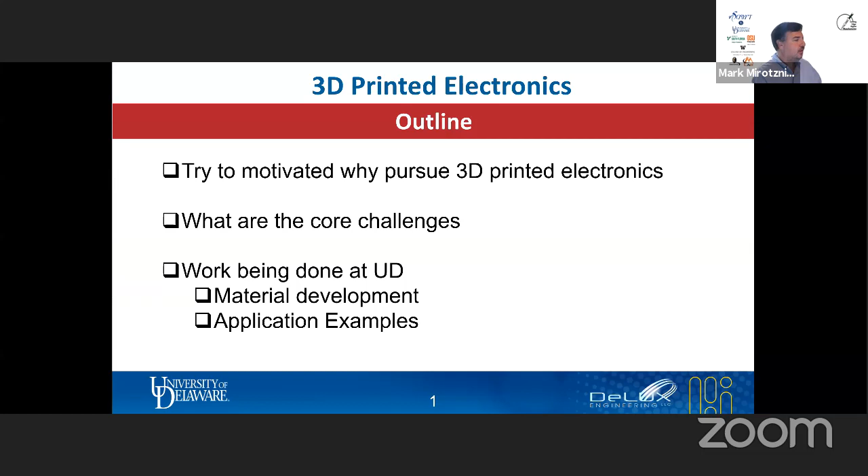So the why question I think is perfectly valid, especially when it comes to printed electronics. If there's one thing we're really good at, it's manufacturing low-cost circuit boards at extremely high volumes, and it's unlikely that additive manufacturing is going to be able to meet the volume or the cost of traditional circuit board manufacturing. But there are a number of niche areas where additive manufacturing has a large role to play. Some of the most obvious, point of need manufacturing. So here's where you need replacement parts that aren't easy to get on the space station, at forward operating bases. So it'd be great to have a printer that could actually generate new printed circuit boards whenever you needed them.

There's applications for small volume, labor intensive parts. We've done projects for companies that made really complicated antenna assemblies that took hundreds of man hours to be able to complete one, and they only made hundreds a year. You could replace some of that manufacturing with additive manufacturing and cut costs. But I'm an academic, so the reason I'm interested in this is really to build things that there's no other way to do. And there's a number of examples of those.

I stole this image on the left from Professor Rumpf, who's going to talk to you in just a minute, because he's doing truly remarkable work on 3D electronics, being able to place non-planar circuits any direction you want. We've done quite a bit of work on complex three-dimensional geometries that there's no way you could manufacture other ways. The image there shows an antenna. This is a very, very tiny high-frequency antenna, but if you dug in the inside, you'd find this has multiple conductive fins that aren't touching and have spatial resolutions of 25 to 50 microns. Very, very difficult to envision how we'd make that any other way.

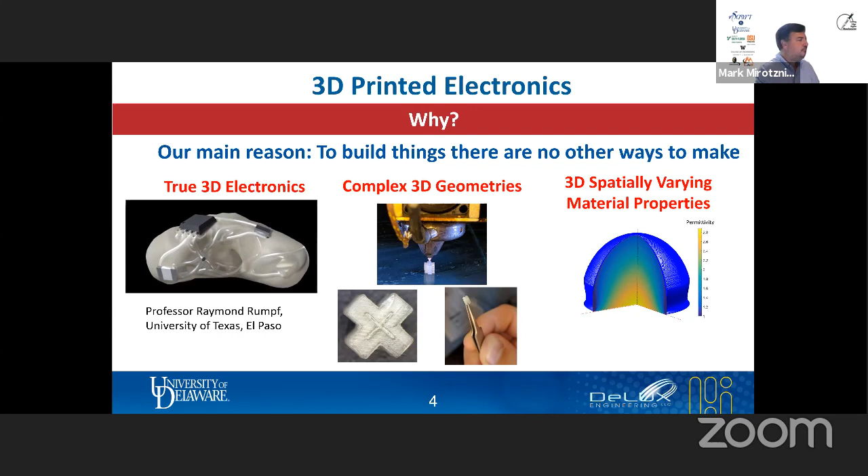Another example, and this is not an exhaustive list, but another example is the ability to make spatially graded or spatially varying material properties. So nobody's really investigated this much because there was no way to really fabricate it. But there's lots of applications where you can create interesting electronics and electromagnetic devices by being able to grade material properties in any arbitrary way. There are some challenges to get there.

Before I go into those projects, let me talk about some of the challenges that I see going forward. And there are quite a few. And I'm going to talk about 4 of them. Materials, software, monitoring and control, and new additive manufacturing or multi-material additive manufacturing systems. I think materials is probably the biggest issue we now face, especially in the kind of work I do in functional electromagnetic applications. Simply a lack of commercially available materials that I can use in those devices.

We're looking for materials that we can print that have high electrical conductivities that approach bulk metal properties. Particularly at the frequencies we're interested in, at the high frequencies, most of the inks and pastes that we purchase and can print are as small as an order of magnitude below bulk metal properties. And for many applications, that limits the frequencies that we can actually use this technology for.

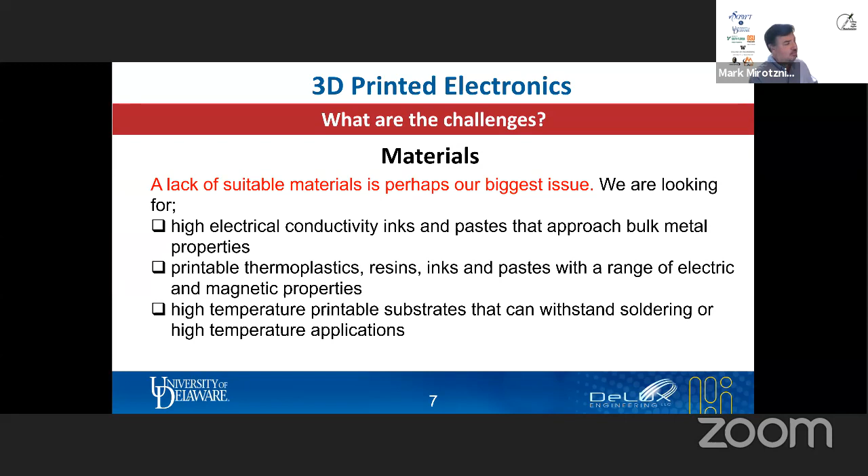We're looking for printable thermoplastics, resins, and inks with a range of electric and magnetic properties, high permittivities, low permittivities, magnetic properties. And we're even looking for a range of materials that are active materials, temperature sensing, piezoelectric or piezoresistive. And I'll talk about some of the materials that we're working on at the University of Delaware, but I think this is a huge bottleneck in the technology that we have to work on.

Another big challenge is the software, and I'm not going to talk about this too much because Professor Rumpf is really the expert on this. Developing novel software that's suited for multi-material, multi-tool additive manufacturing, that doesn't exist. Most circuit board analysis and layout programs are designed for single or multi-layer planar boards, single substrate, right? But if we're trying to make conformal or pure 3-dimensional structures, that software is inadequate.

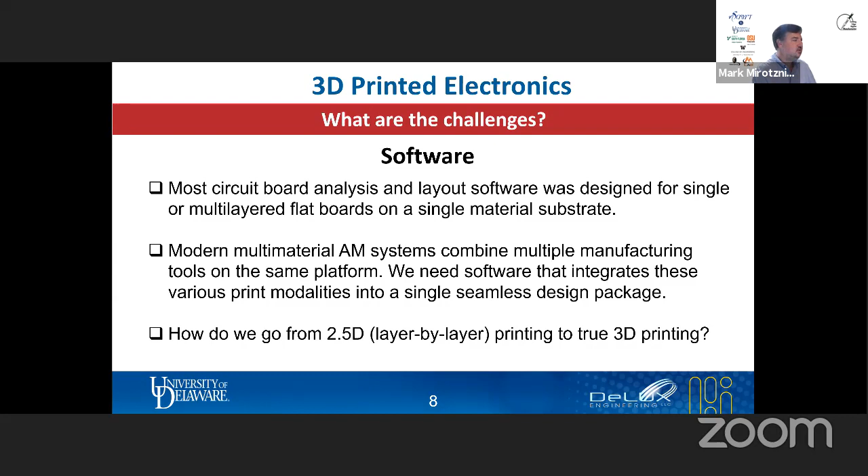Moreover, all the additive manufacturing systems that we use to build these, the multi-material, multi-tool, combine multiple manufacturing tools on the same platform. So the software has to be able to seamlessly integrate all those tools together to build the device. And the last question is, how do we go from what's currently done? We call it 3D printing, but it's really 2.5D, layer by layer, to true 3-dimensional printing. So software is a big challenge that I think Professor Rumpf has made large advances on.

There is a critical need for us to be able to do process monitoring to at least identify when a problem occurs and maybe stop the print process, but better yet, come up with control features that can identify problems and be able to rectify them during a print process. I think that's absolutely critical for us to be able to match the quality and consistency of conventional manufacturing.

I think of all the applications you're going to see me show today, and probably most of my colleagues, there's boxes of failed prints that happen before and after the one I'm going to show you. It's very difficult in these things to get consistent results when there's no process monitoring or control.

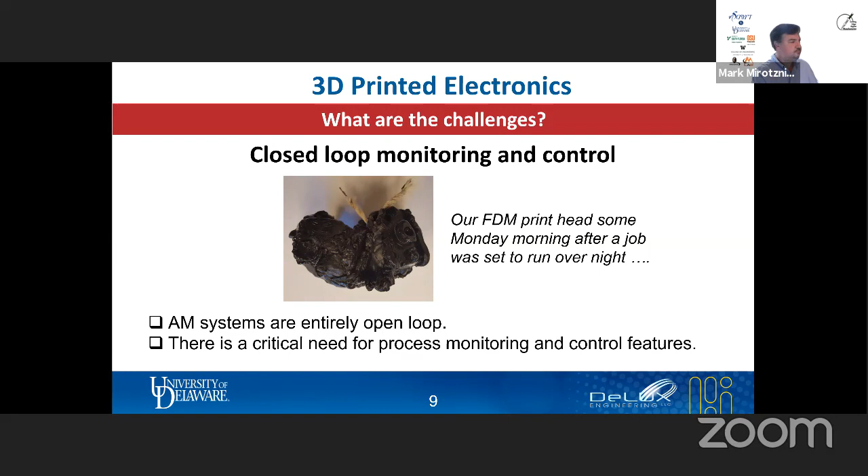The last thing I'll talk about is the systems. Most people who do electronic 3D printing actually combine a number of 3D printers together, either through manual assembly or by moving the part manually. They'll print polymers using FDM, then move it to another machine to put metal on, then pick and place or manually insert components. This results in really long fabrication times and lots of failures due to registration errors. With the spatial distances we're trying to reach, it's not practical to move the part from one machine to another. For some of the more complex 3D electronic designs we've worked on with Professor Rumpf, it's impossible to make these structures without an integrated approach.

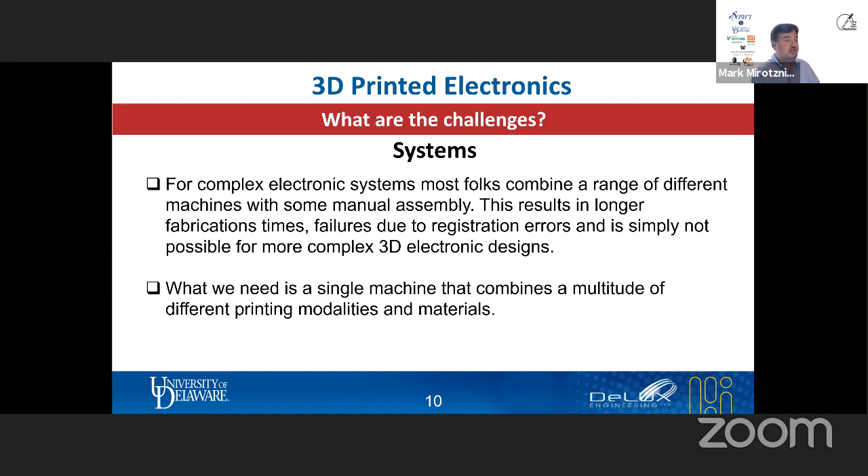So what we're really interested in at the University of Delaware is this Swiss Army knife approach to additive manufacturing — a single machine that combines a multitude of different printing modalities and materials without having to move the part.

I admit I don't work for nScrypt, but I'll put in a plug. We're big fans at the University of Delaware, mostly because they have what's closest to the Swiss Army knife approach to additive manufacturing. Their systems allow us, on a single very high resolution stage, to put a variety of printing modalities and materials together. At the university we currently have two 3D printers, the 300 and the tabletop, and we're getting our third printer towards next month, a 6-axis system I'll talk about, plus a host of gizmos we can print with — some purchased from nScrypt, some custom made and integrated into the system.

For those who've never used an nScrypt, there's a variety of things you can do with it. The smart pump technology on top can print virtually any ink or paste. We make all our custom materials across a range of viscosities, and we've printed everything from modeling clay to water out of these at very high resolution. This lets us do a lot of work in material development of new materials and print those as custom inks and pastes. It also has a very nice FDM printer for thermoplastics and pick and place of electronic devices.

We have a micro mill, which is really useful for RF devices because many surfaces are too rough after we FDM print them at high frequency. So we go over those surfaces with the micro mill and smooth them down to a couple of microns, which makes a huge difference.

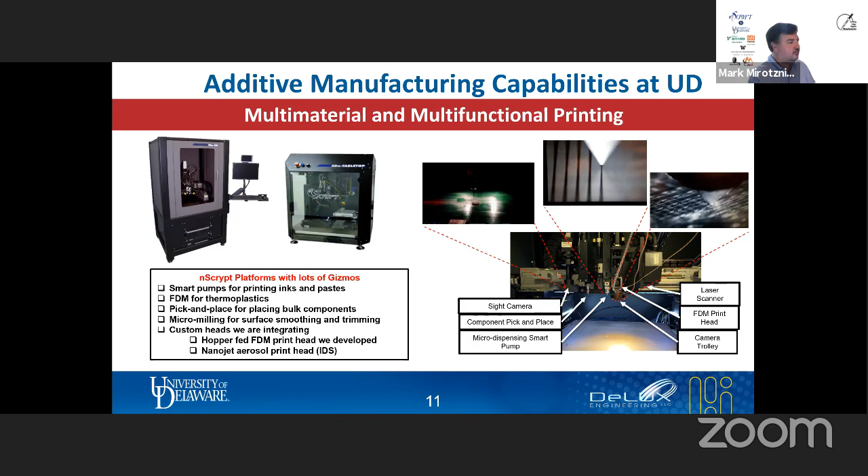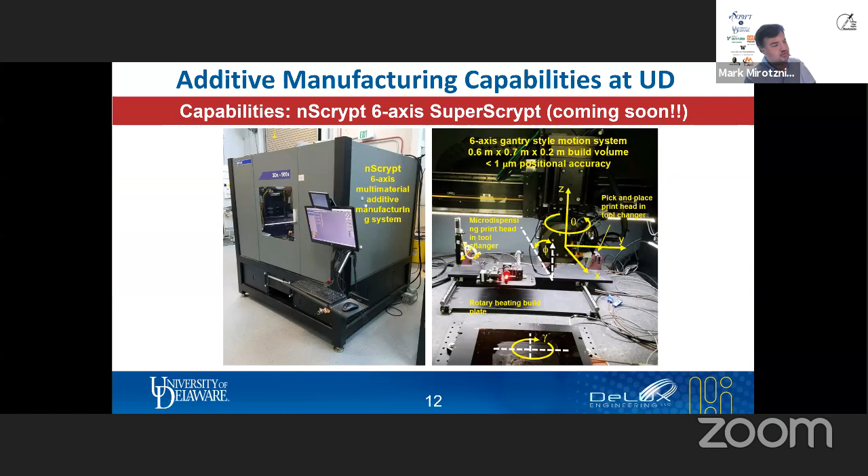So this is a range of gizmos we're able to use. This next one is coming — what we're really excited about, to get away from XYZ printing and go to true three-dimensional printing. This nScrypt is coming next month, and we'll be able to do true 3D printing through a 6-axis system: pitch, yaw, rotate part, XYZ, all the same gizmos through a tool changer. We're super excited about exploring that.

A little bit about the laboratory I have at the University of Delaware. We have a brand new 4,500 square foot lab dedicated to research and applications of functional additive manufacturing. This is where we house all the nScrypts, all our material development, and a variety of other printers. I talked a little about materials being the bottleneck — I'm not a material scientist, and I kind of got pulled into that kicking and screaming a little bit, but it's absolutely essential to do the kind of things I want to do.

And so we do quite a bit of functional material development at the University of Delaware. We have our own custom made polymer filaments for FDM. In this case, these are filaments that we put additives in to change their electromagnetic properties. So we can make high dielectric constant, low dielectric constant, magnetic, temperature sensing materials. We've made a range of polymer filaments that we can spool and print using FDM.

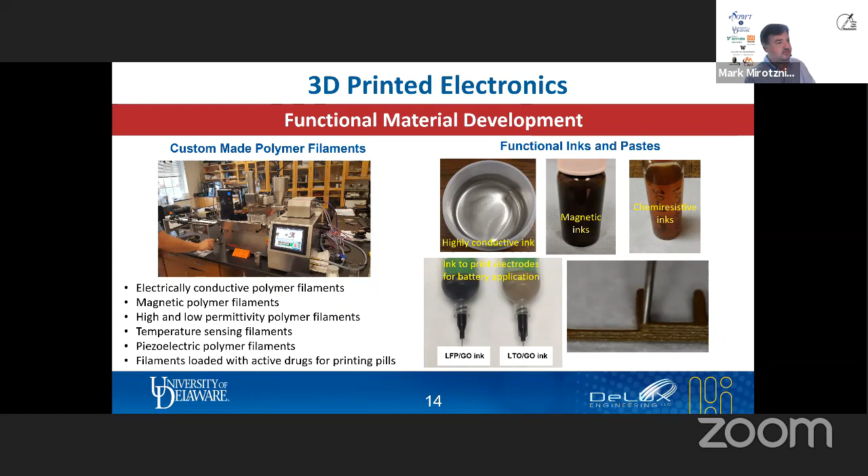We also make a lot of functional inks and pastes that we can print with the smart pump technology. We've made our own highly conductive inks, magnetic inks. We have a chemiresistive ink that we use for chemical sensing, and we're starting to print batteries.

So I'm going to jump into some of the application areas that we've worked on to give you a sense of where we think the state of the art is. The bread and butter for most of the work that I do is really high frequency RF applications, and we've made RF devices that have worked all the way from DC to 110 gigahertz.

Here's some examples. The one on the left is an RF printed assembly. This was a military project to see if you could 3D print the front end of a Ku band communication or radar system. Everything you see there was either printed or pick and place, with the exception of the connectors, which were put on at the end. Everything else was printed or pick and place, and it functioned.

The goal of this project down the road is to make this entirely conformal, so we'd have an RF front end that we could fit into a cone shape or a spherical shape.

And Mark, you got about 2.5 minutes left. Okay, then I'll go fast.

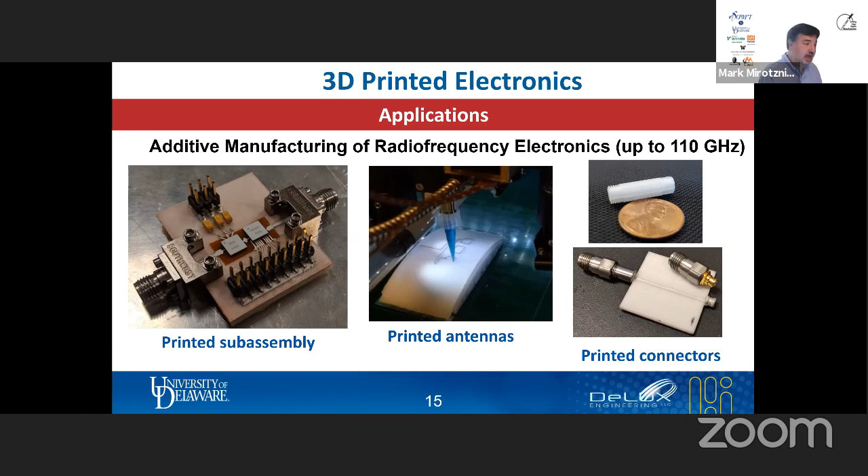So then we've done a lot of printed antenna stuff and connector work. Here shows an example putting it all together. This is an antenna. I don't think there's any way to make this without additive manufacturing. It's a dual band, dual polarization antenna, has 2 different permittivities and all printed connectors. These are SMA connectors that are threaded that we print on the structure.

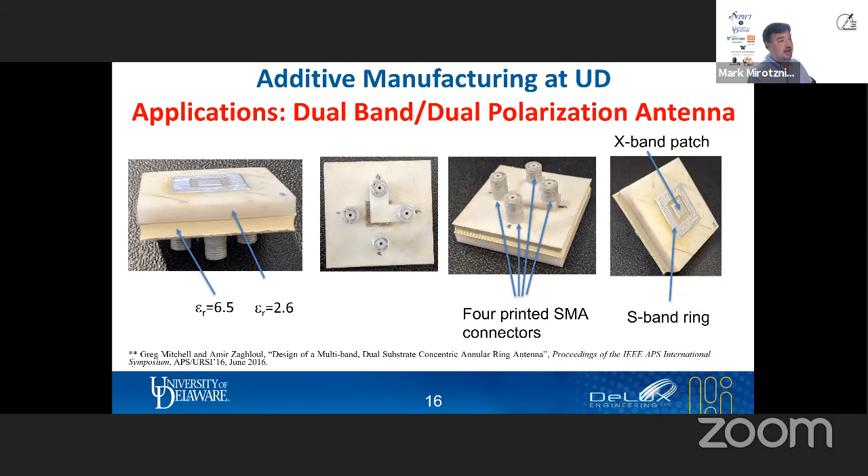The connectors are by far the least sexy, but the most useful part of the device, and the point of large failures. This shows us printing a chemical sensor.

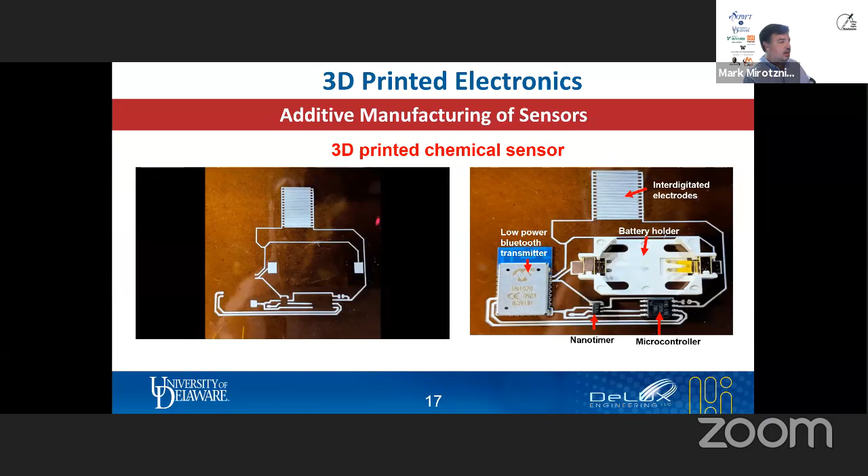So this was used to try to, on a flexible substrate, show the nScrypt being able to print all of the electrodes. We had a chemiresistive ink that we put on there, and we could pick and place all of the electronic gadgets. At the end, all we did is put a battery on there and it worked.

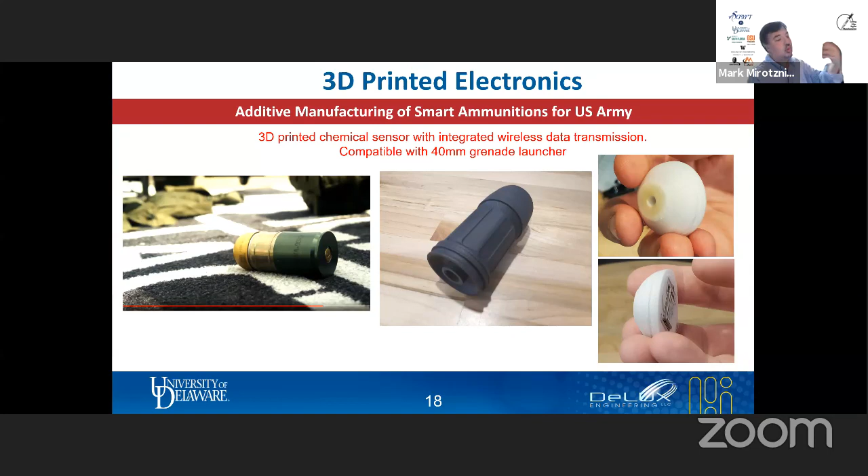We've integrated that chemical sensor actually for an Army project into the shape of a 40mm grenade ammunition. The idea here is we have a chemical sensor in this form factor that soldiers can carry with them. They already carry these 40mm grenades. Instead of taking the normal grenade, they would take the chemical sensor, launch it into an area they're interested in. It will wirelessly transmit chemical data back.

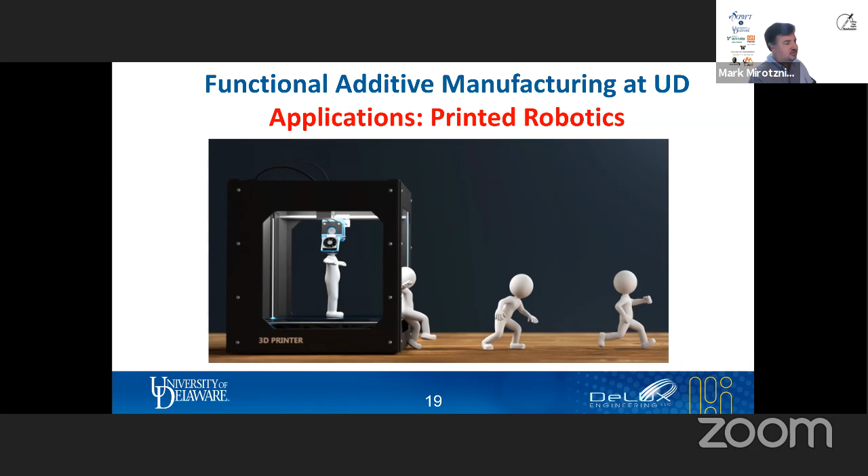This is the last one, I'll stop at this. So the last project, kind of a fun one, is printed robotics. The idea is, can we print a fully functional robotic system that when it walks out of the printer, pushes the button and prints the next robot? We're not quite there, but this shows the progress we've made over the last year.

So the idea is everything is going to be printed or pick and place. We're not quite there yet. It'll be removed automatically from the build plate, can move off the build plate, survive a fall, and then you can make the next one.

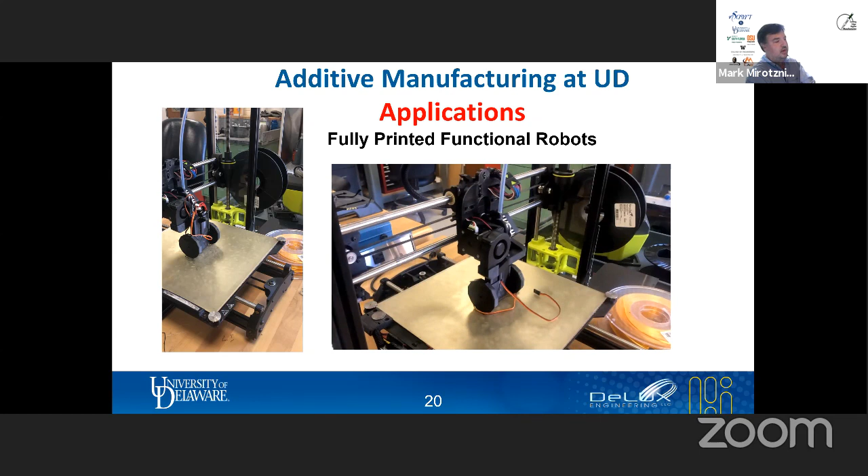So this is a fun project we're working on with Tardec on seeing whether we can do this. This shows it being snapped off the build plate.

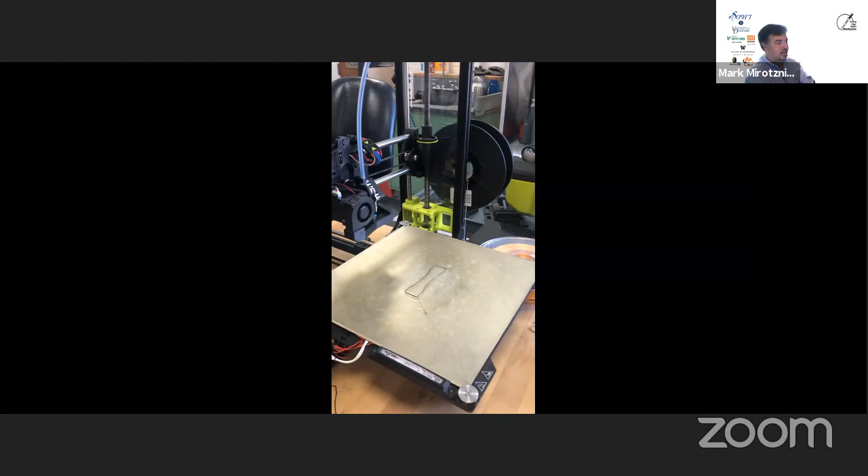And I'll end when you can see it falling off the table. So it had to survive a fall off the table onto hard ground, and pretty soon you'll see it scatter on the ground there. There it goes. So that's about the closest we got to an automated 3D printed robot.

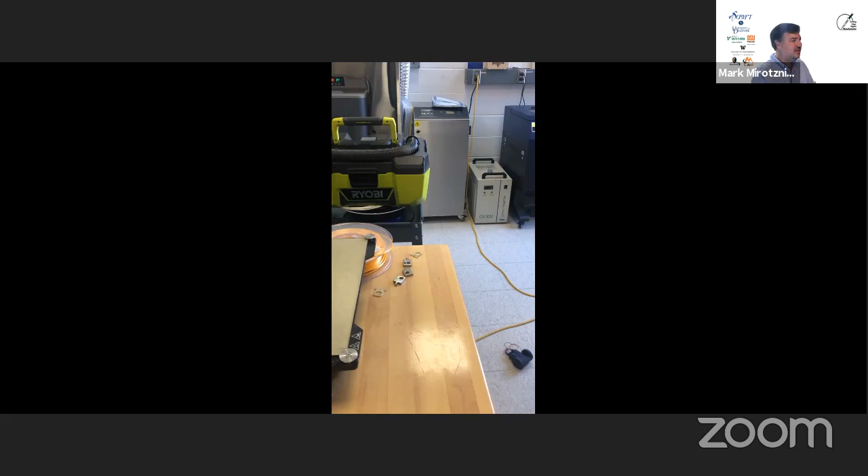Hopefully if we do this next year, I can show you advances on this. So I'm gonna stop there. We've done work on printed ceramics, high temperature applications, so if anybody has any interest there. And we've done a lot of work on passive beam forming lenses for antenna work. So I think I will end there, and I'll take questions at the end.

Thanks a lot, Mark. I appreciate it. Jing?

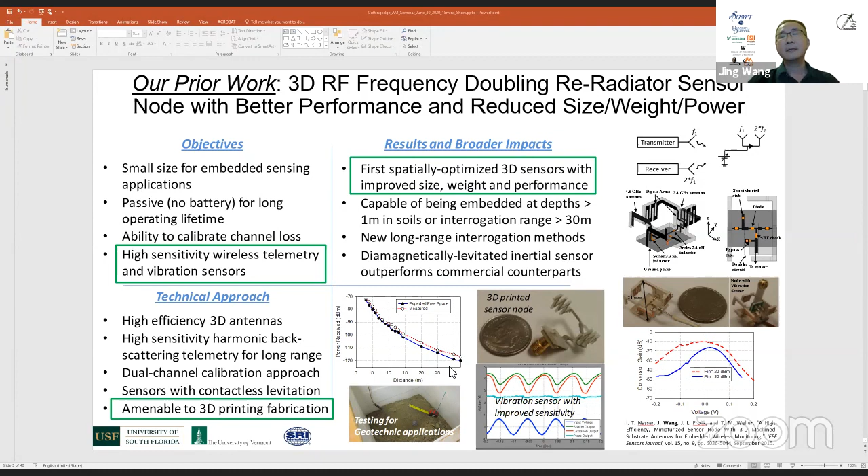In order to do additive manufacturing, we chose to work with the technology offered by nScrypt, which combines laser machining with additive machining in a single platform without moving the part off the printer bed. We started by printing multiple layers of alternating materials, printed substrate material and printed conductive material, in a way very similar to how traditional multi-layer printed circuit boards are constructed.

We did this by adding features such as electronics, either manually embedded or pick-and-place embedded, into other important RF components, such as the feeding network for antennas, the antennas themselves, and some combiner, splitter, and filter functions for power.

With added laser machining, we were able to achieve feature sizes down to about 3 to 5 microns, as detailed in a later part of the discussion. We also played with the wavelengths of the laser to enable the feature size to be in a certain range. As you can see in this picture, using the laser you can cure the ink at particular locations, which also helps reduce the losses of the conductive ink.

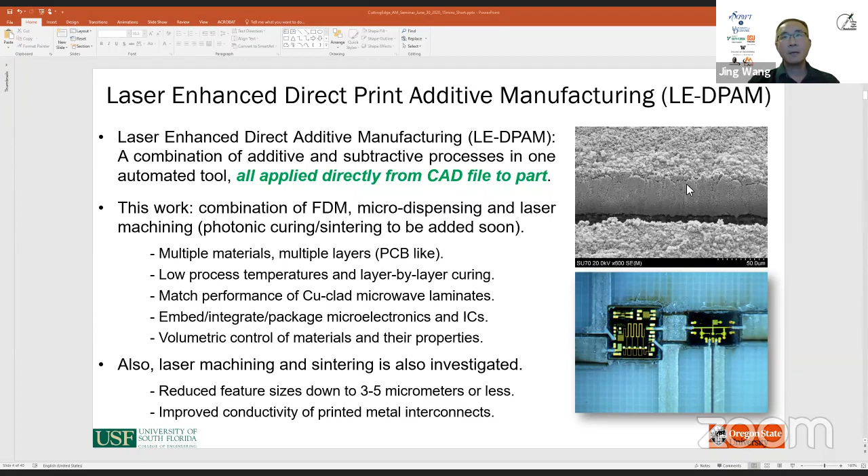So carrying on the previous work, we try to simplify the layer structure, fully modifying the layer material properties, such as making some of the layers with low infill ratio, targeting better radiation performance, particularly wider bandwidth, better front-to-back ratio by inserting a cavity on the back of a patch antenna and feeding the patch antenna using aperture.

And also one of the key elements we already have in the previous example, in this case, we try to introduce a conformal low form factor, hopefully totally flat insertion of microelectronics. At this stage, we're still dealing with packaged electronics, such as phase shifters, switches, and other electronics, all combined into a multi-layer print. The previous example has 7 conductive layers, 7 substrate layers. Most of these prints have fewer layers to further simplify the print, improving the yield and also reducing the time.

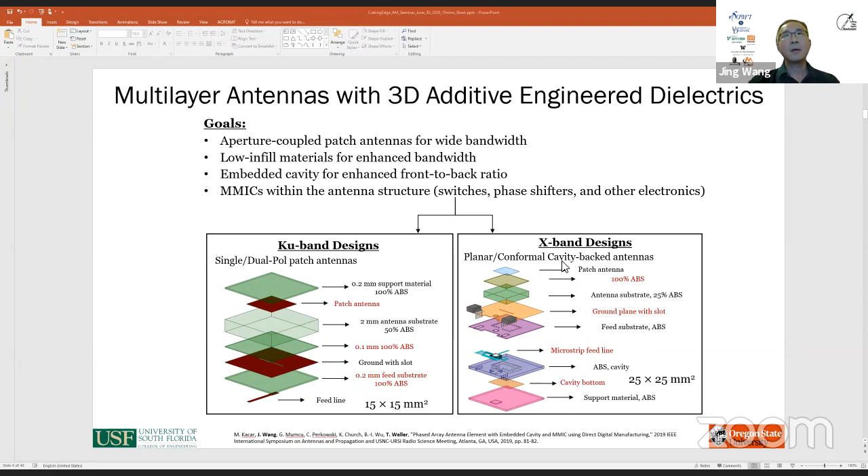So the next page is an example of this print. So we designed such an X-band phased array, and this phased array shows 4 conductive layers and 5 substrate layers. Most importantly, in order to improve the antenna radiation pattern, we introduced 50% infill ratio, reduced dielectric on the back of the patch antenna. And also we inserted this cavity to modify the front-to-back radiation pattern.

And we directly inserted the phase shifter chip in a QFN package, while directly printing on top, making the cavity, using isolated via hole pillars. By implementing all these measures, we achieve a fully printed phase shifter package.

And we are able to engineer the back lobe, as I will show you in the next page, and the front-to-back ratio. And we're able to tolerate different types of antenna design and feeding network. In this case, we're using aperture to feed it, but we could also change it to other configurations as well. So there's 4 layers of printed ink and 5 layers of ABS substrate in this multi-layer print.

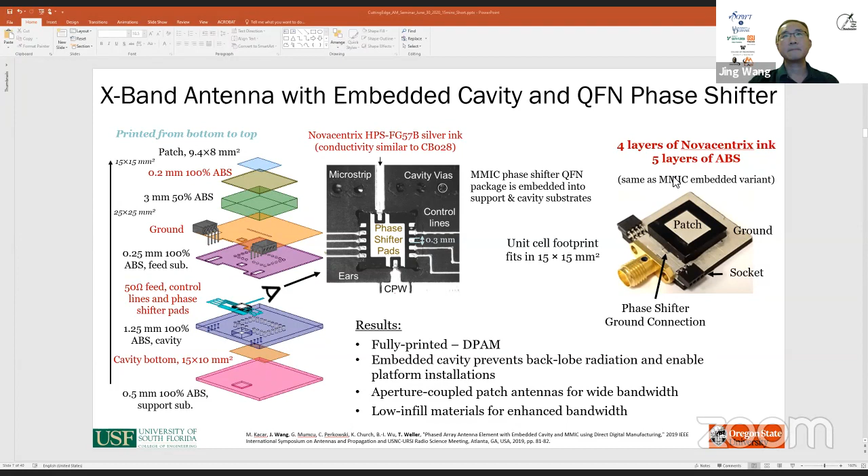So here shows the electronic measured performance of such a phased array. As listed here to the left, this phased array shows about 24% of bandwidth. As you can see, all the bits show a good reflection coefficient between 9 and 11 gigahertz, which is the operational band of such a device.

And we achieve a radiation gain. The peak gain is 7.2 dBi, with 6 dBi of gain between 9 and 11 gigahertz. And this device shows radiation efficiency of 80%, while including all the transition features we incorporated into the print, and showing a front-to-back ratio better than 20 dB.

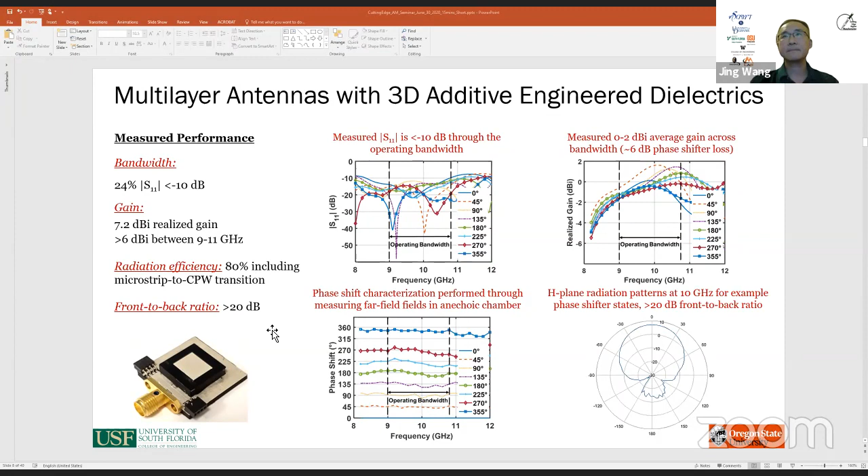Most interesting is this plot, which shows the different bits of the phase shifter. As you can see, they're more or less flat across the operational band. So since I'm not showing this in slide show mode, this movie will not play.

This would be a movie showing how we print the cavity on the top to hermetically seal the already packaged IC underneath. After sealing the IC, we also tested this package as a hermetic protection. Besides the electronic feeding on the side for DC and RF signal, this package we directly printed on top also serves as a hermetic protection against the environment.

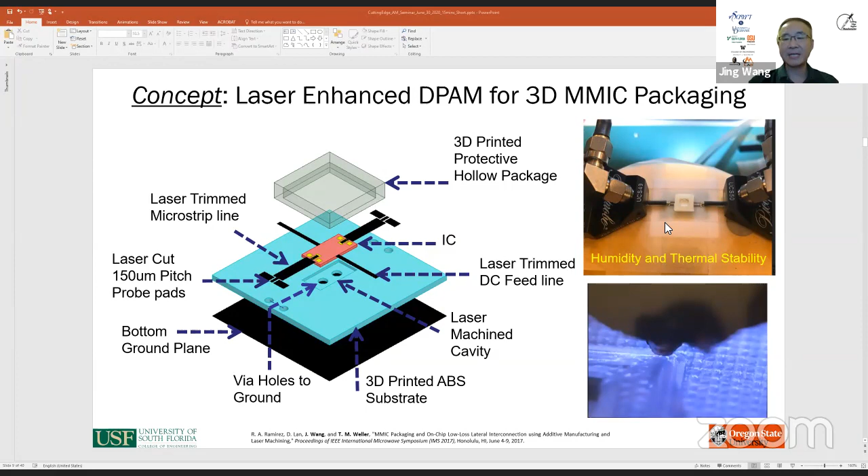So this briefly shows all the layers. One of the most important features was to use laser machining to make a cavity. So when we pick and place or manually insert the IC die, which is about 50 to 100 micron in thickness, the IC can snap and sit in the precise position and flat on the surface, in contact with a via hole or ground contact on the back.

On the front side, instead of using wire bonds, of course, we directly printed the interconnect to all the probe pads, which are in the 50 to 80 micron size range. In order to make a transition between a CPW probe feature into the microstrip, we're using laser machining to enable that, which allowed features down to, back then, 10 microns at a longer wavelength.

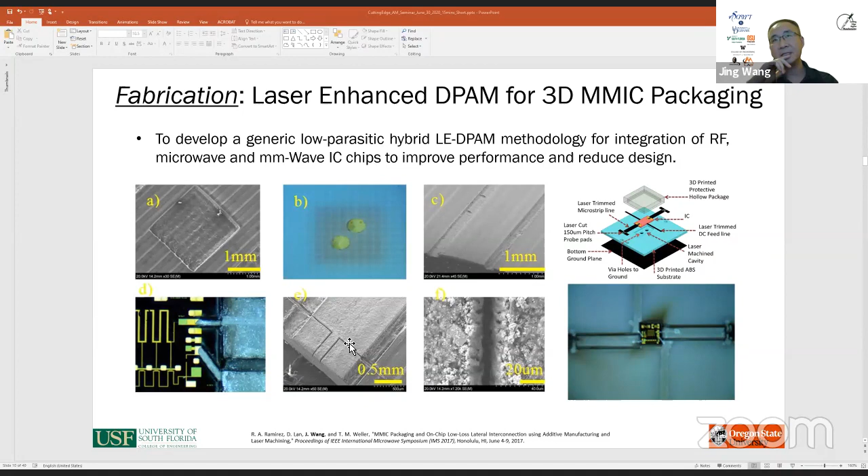Let's switch one more page. There's always a delay for switching page. Anyway, I keep on jumping that page.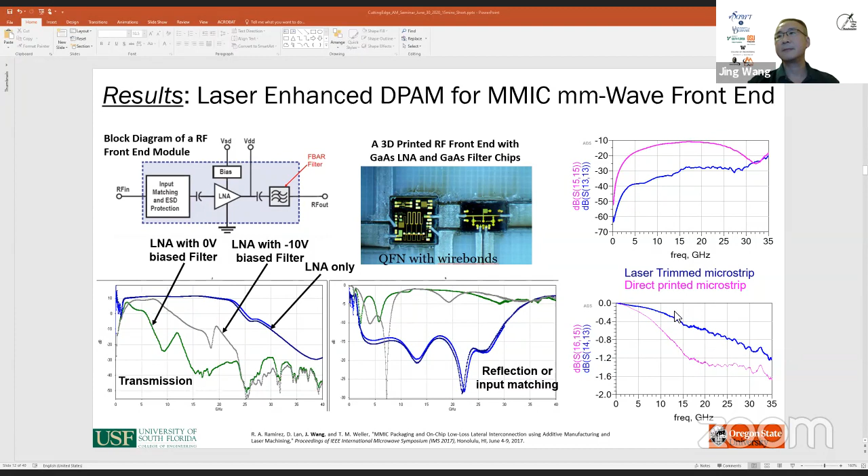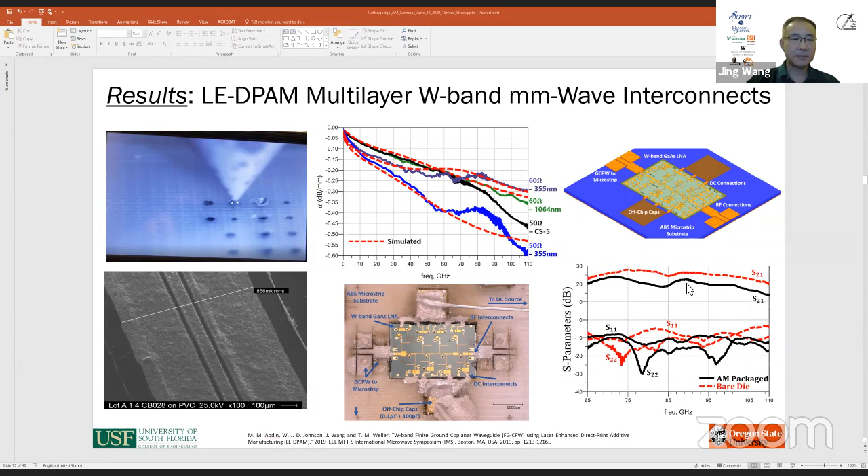Dr. Wang, you have about 2 minutes. Okay, so let me move to the next page.

So the next topic, another important topic I can hopefully quickly cover in the 2 minutes time frame, is moving towards dielectric. This is driven by the fact that most of the conductor losses are still very high when you talk about 50 or 100 gigahertz and above, but as you go into higher frequency, the wavelengths also shrink due to the use of sometimes high dielectric constant material. And there's the ability to print those as if they're optical fiber. You can incorporate features like total internal reflection using those fiber-like dielectric waveguides as interconnects between chips, sometimes between integrated circuits and modules.

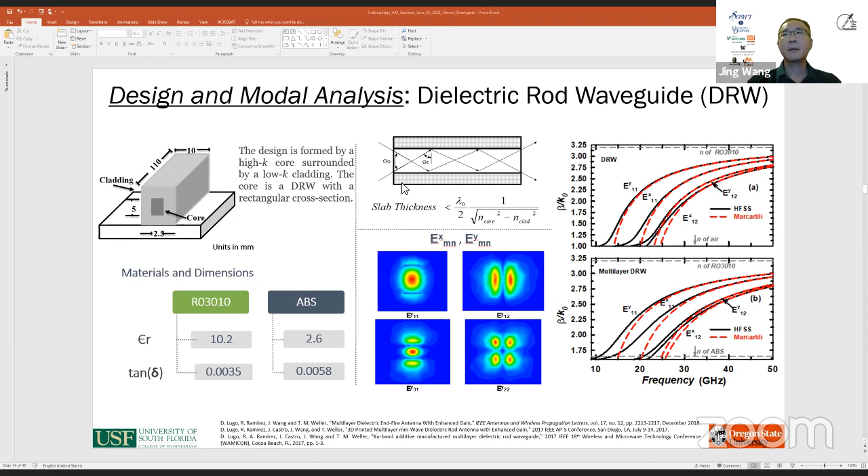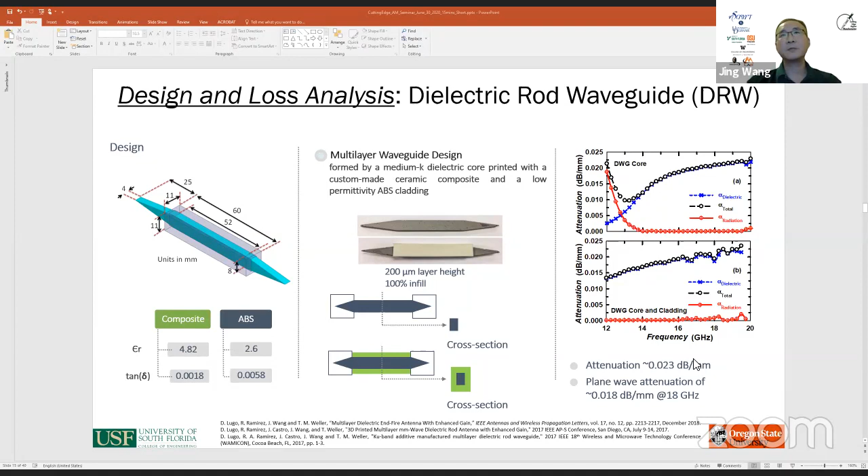So as a result of that, we also further investigated such a feature with and without a so-called cladding material to further increase the bandwidth, while also reducing the coupling to adjacent features, allowing the structure to bend. One more slide I will show is for such a device with and without cladding layer, which is a low-K dielectric enclosure.

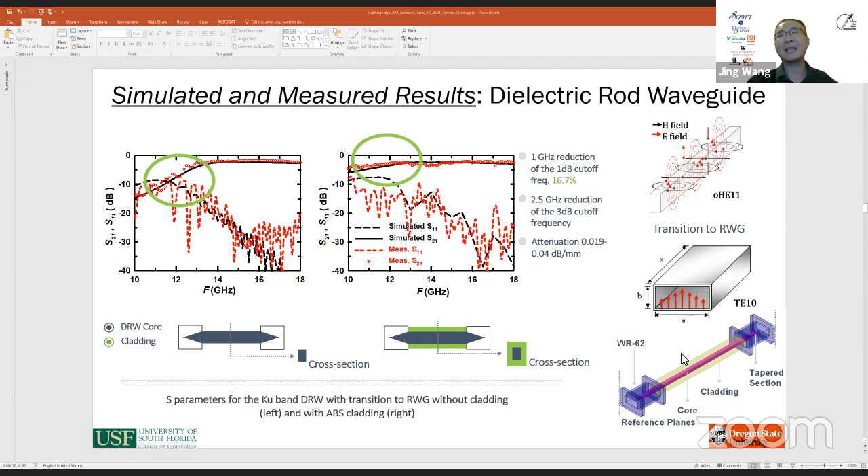If I can switch slides.

The next topic we'll talk about a little bit is how to use the planar feeding network to feed such a device, which we started to research in recent days.

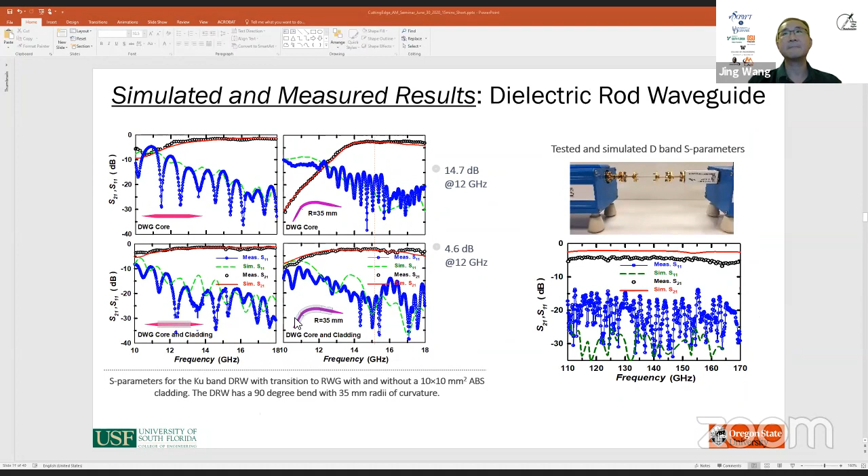Somehow switching the page is slow. If I can go back one more page. Yeah, Dr. Wang, unfortunately, I'm going to have to ask you to finish up pretty soon. Okay, let me just go to the final slides.

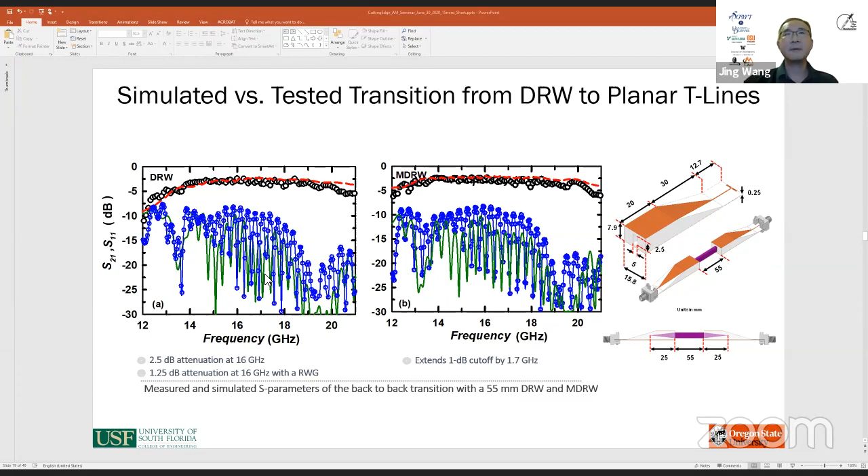With that, I will just quickly say our research focuses on a combination of different integration of electronics, but also introducing spatially engineered 3D printed dielectrics to allow you to make unique radiation devices such as antennas. In order to do so, we also develop all the material in-house. With that, I will just conclude.

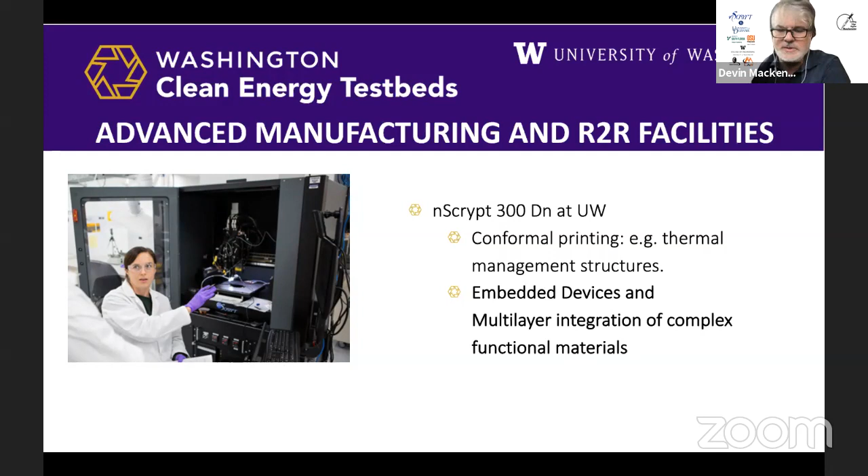And so I'm going to talk on 2 areas, one in batteries, and then I'll talk about some wellness sensing, special medical sensing devices where we need that really special materials capability, and how do we hetero-integrate materials in a single manufacturing process.

So batteries: everyone needs batteries, whether we're trying to make Teslas, SpaceX satellites, Bluetooth headsets or IoT devices. Batteries are a ubiquitous need. At the small end of that, thinking about IoT, smart labels, wireless, medical and pharmaceutical related devices, the batteries need to be extremely thin, and have other important characteristics. They have to have very low environmental impact.

As we start seeing smart packaging, say cold chain labels, electronic labels on your package of meat from the grocery store or your pharmaceutical delivered via internet, you want to know that those foodstuffs or those drugs have been kept at the correct temperatures, or are actually what they say they are, brand protection. We're embedding electronics into those.

We want those electronics to be inconspicuous, embeddable, and the competition in that space is essentially the printed barcode, which is incredibly inexpensive and very conformal, easy to use, but of course passive. We want to add active functionality to that, but we need to do it in a way that's very low environmental impact in terms of materials, because many of these devices will end up in a landfill. So lithium is out. Of course, lithium for transportation is also an issue, because lithium content in a transportation package can deem that to be a hazardous material shipment, which is also a big problem.

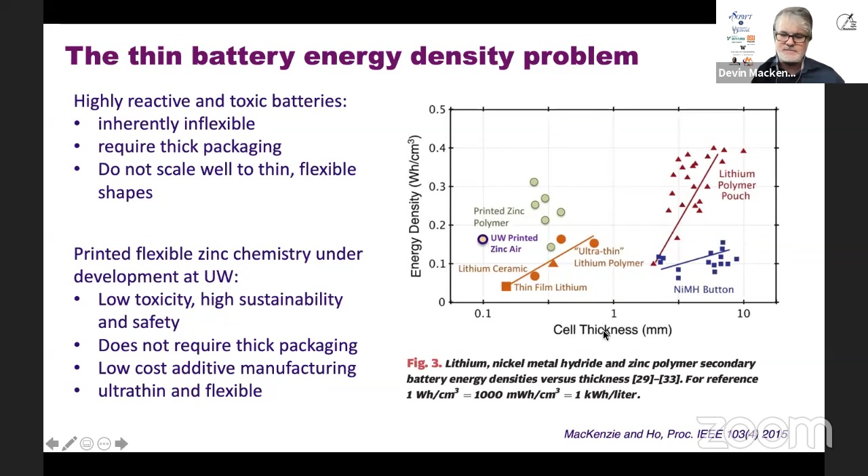So we've developed a material set. Getting a little bit slow advance here.

We developed a material set to realize a fully printed, additively manufactured metal air battery system, where we use 3D printing in planar structures to integrate complex materials, where we want to monolithically integrate a battery. We can't use a separator and packaging assembly cell like a lithium pouch cell that's held together by atmospheric pressure. We need to make a monolithically integrated battery where each layer is in electrochemical or electrical contact with the other layer inherently, and requires no further assembly.

So we develop custom conductive inks, of course, to conduct electricity, but also anode inks, in this case zinc metal inks with conductive additives, to provide our zinc ions for our zinc batteries. We need to develop electrolytes, and this is probably the trickiest part. We develop polymer, ionic liquid, deep eutectic solvent-based electrolytes that print as liquids but then hold a solid shape so that we can print on top of them, which is fundamental.

Not only do they need to hold their shape to print on top of them, but they also need to hold their shape in the final application. There's no other separator here. There's no mechanical structure that can keep the anode and cathode from shorting into each other, except for this electrolyte. So it has to be a semi-solid electrolyte. So we develop these materials that can be printed and then formed into semi-solid or solid flexible materials.

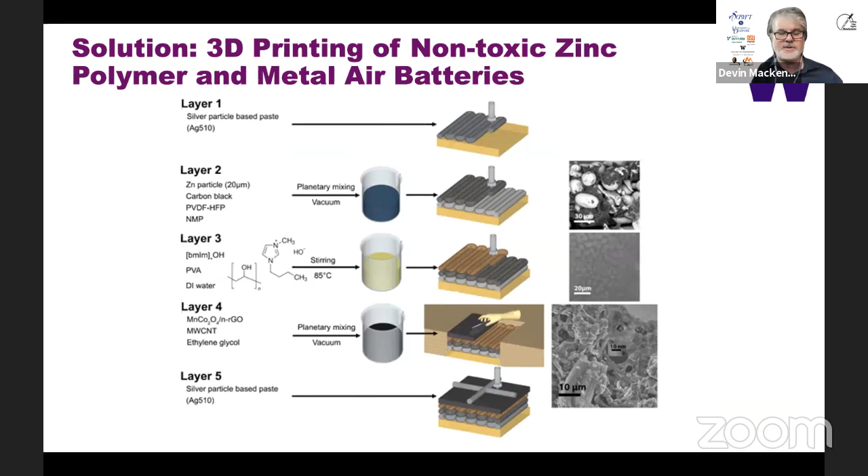And then on top of that, we'll, for example, inkjet print a grid-like current collector to collect the large currents and pull them out of the battery. This is an example of a cross section. As far as we know, this is the thinnest printed or flexible battery of its kind in the world. We see a structure of an anode, a solid printed electrolyte, and this hierarchical catalyst.

And we demonstrated that by developing those materials, really optimizing the electrochemical performance but also the electrical performance, to get to high rate pulsing, something notoriously difficult for metal air batteries.

You use metal air batteries in hearing aids. You stuff it in your ear, it's warm and moist, works great. But those are actually very low current batteries, maybe 1 over 50 to 1 over 10 C batteries, in the sense that they dissipate their capacity over 20 to 50 hours. That's a very low rate. They're typically very hard to get to pulse. If we want to use those for wireless sensors, for really almost any ultra low power electronics now, where they're primarily in a sleep state and then woken and activated to send or receive a wireless packet,

they need instantaneously very high current. For this size of battery, anything from a few milliamps for very low power BTLE up to 100 milliamp pulses for something like LoRa long distance wireless signal. Because of this very thin integrated structure, we've been able to demonstrate multi-milliamp, maybe 5 milliamps per square centimeter or more, pulsing out of a 100 micron total thickness battery. That's everything, substrate to top of the battery, 100 microns in total.

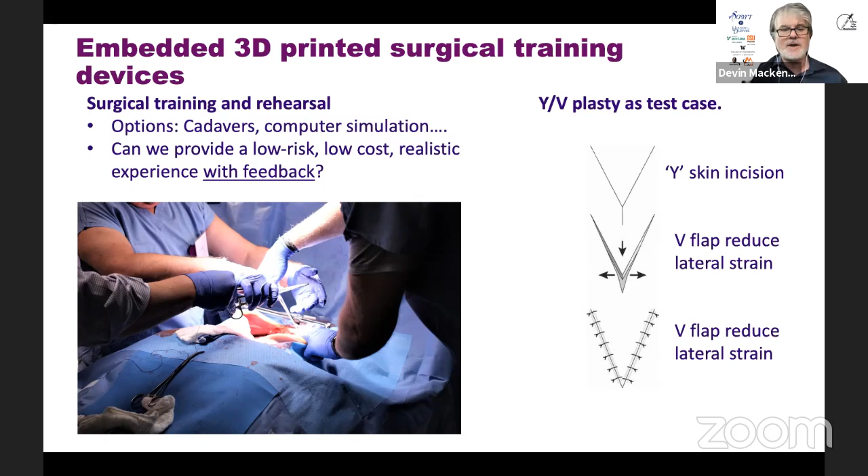So working with the CREST lab at the University of Washington Medical School, we developed stretchable electronics for medical simulation that provide feedback. An example operation is a Y-V plasty, where a part of your skin is pulled down, restitched and stretched, getting stretched a couple hundred percent during the procedure. We want to know if students or doctors practicing a complex operation are doing it properly, stretching enough or too much. We want to sensorize this device.

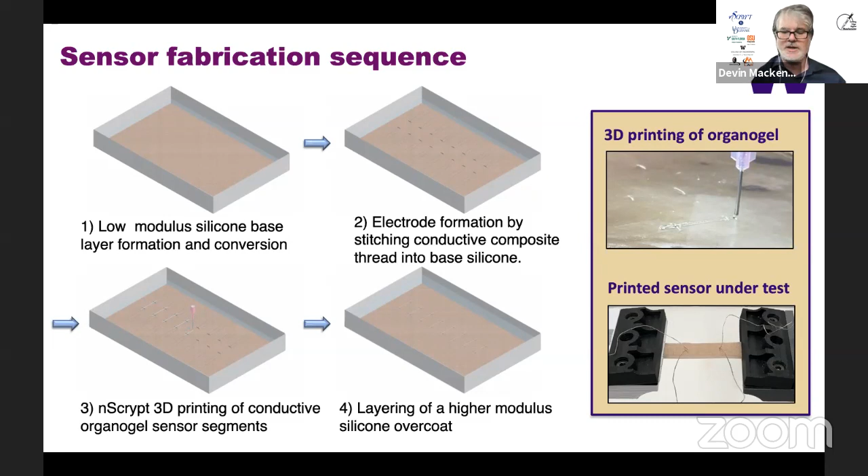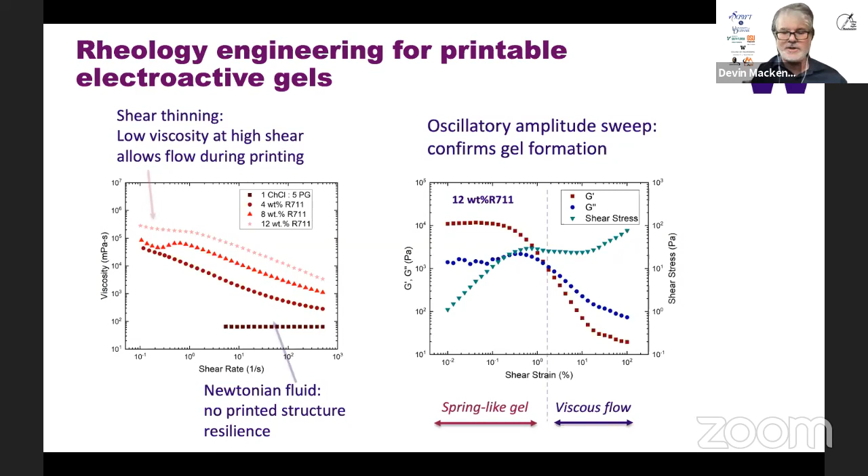So we developed a 3D printed structure involving different silicones to simulate skin, but most importantly we developed a 3D printed organogel, which is the actual meat of the sensor that allows flexible sensing. We had to custom engineer that material to get special flow properties, so it flows while printing but is solid as it sits, so the feature doesn't slump, but also so we can print other materials on top of it to simulate additional skin layers without losing its physical shape. We do a lot of rheology engineering on those inks, in addition to the electrochemical properties, to produce gel-like and viscous flow regimes in a printable sensor material.

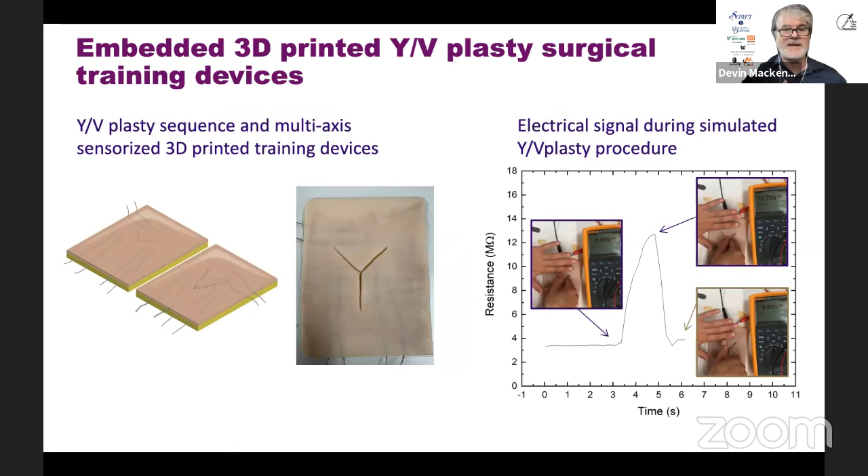Here's an example of a fully integrated 3D printed sensor, where on the right you can see the electrical response as we stretch these different skin flaps during the stitching operation. We get direct feedback, something mechanically similar to human tissue, but that gives us sensorized feedback for training and practice.

We've shown this sensor to be quite reproducible over many thousand strain cycles, using these rheologically engineered, 3D printed organogels from our nScrypt system, with very close tracking between input signal and sensing signal, and very high reproducibility.

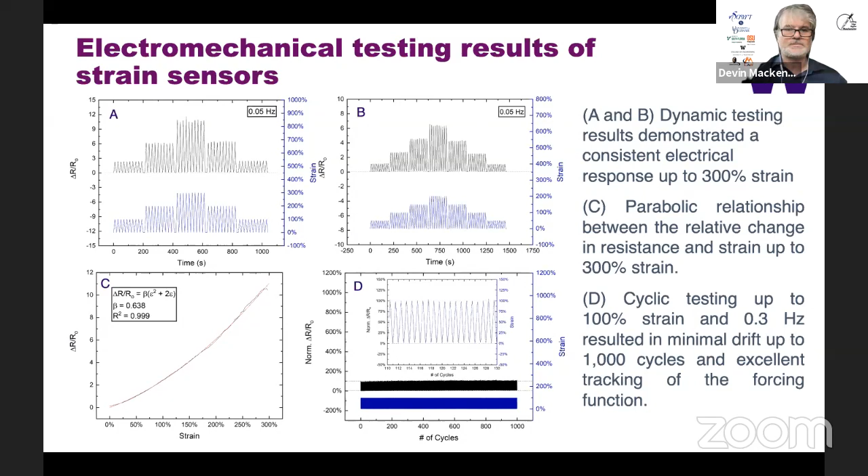I'd like to close by saying this fits into a larger part of our lab, which is an open access industrial laboratory. We provide access to the nScrypt tools along with all other print tools, characterization tools, and professional staff for people to do research across scales, from prototyping and small scale manufacturing all the way through to very large scale solar manufacturing and even grid integration studies. So with that, I'll wrap up.

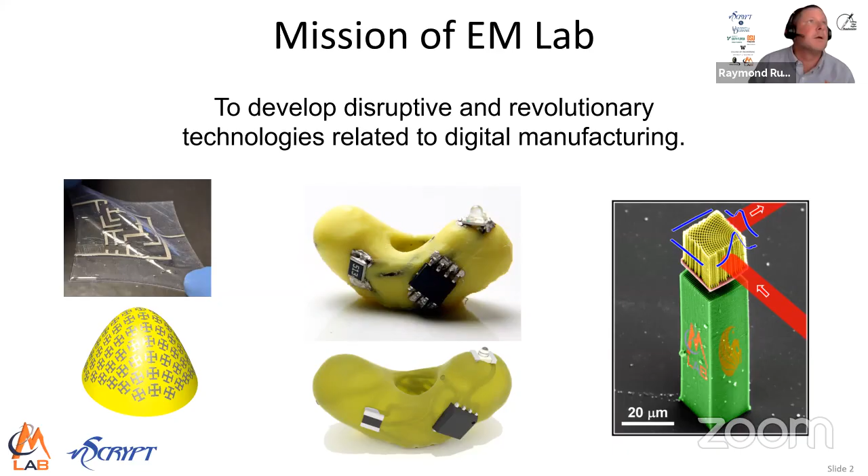So I think a great topic to talk through is our work in 3D volumetric circuits, and this is really what drove a lot of our innovations here. If we think of circuits, we think of roads on a map.

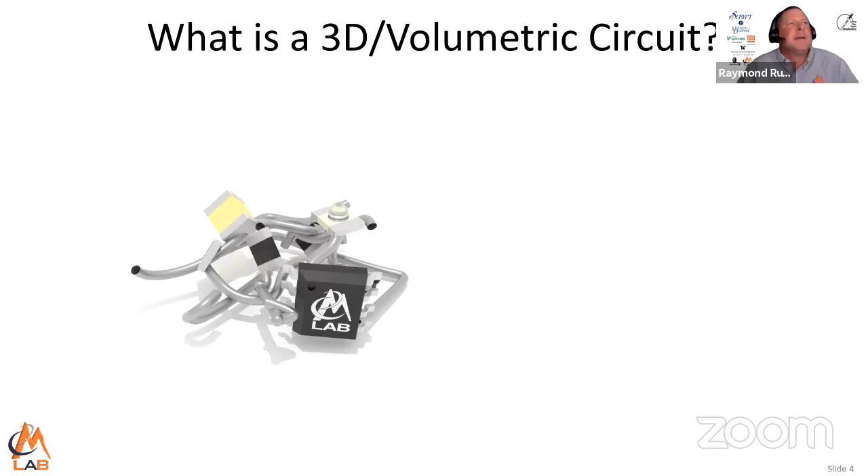And if we pop open our computers and we look at the circuit boards, everything is quite flat. So we have in mind doing something that's much more 3-dimensional, where the components can be placed at any position X, Y, Z, can be oriented at any angle theta and phi, and the interconnects can follow these smooth sort of splines throughout 3 dimensions.

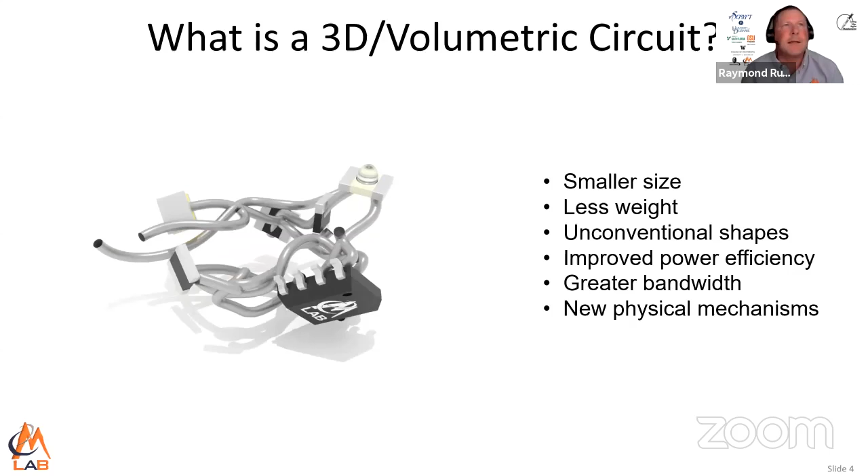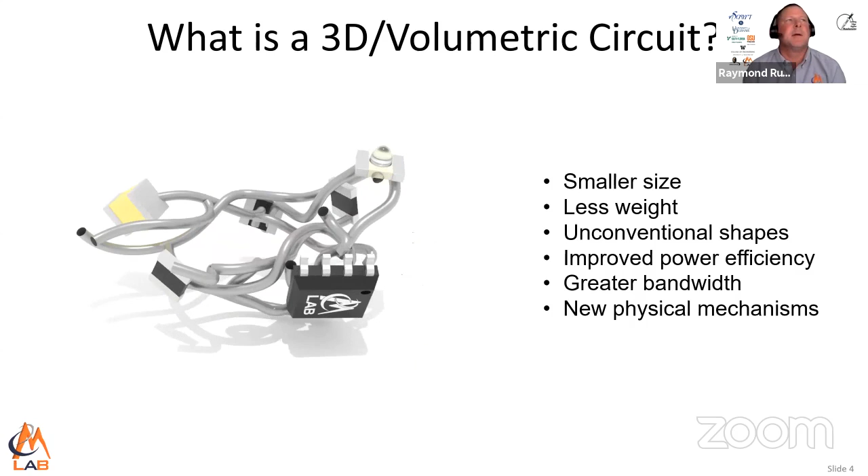And if that could be done, that would allow a much more intelligent placement of the components, which would minimize your size, would minimize your weight. It would reduce the lengths of the transmission lines, which then improves power efficiency, increases bandwidth. If we can avoid sharp bends and vias, we're reducing parasitic impedances to improve bandwidth and performance. And in 3 dimensions, there's just physics that exists that does not exist in 2 dimensions. So there's a lot of reasons that we wanted to go 3-dimensional.

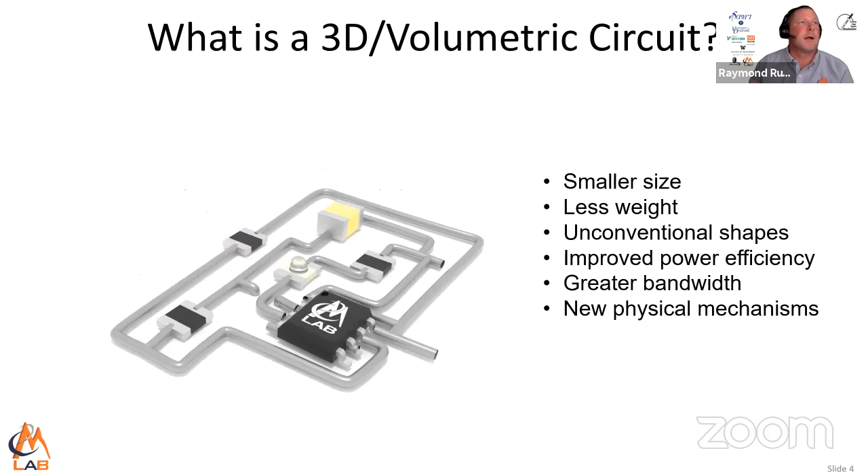And so this drove a lot of work. The first thing we realized, like Dr. Boroznik mentioned, there's no tools or software for doing this sort of thing. So here's the process that we eventually came up with.

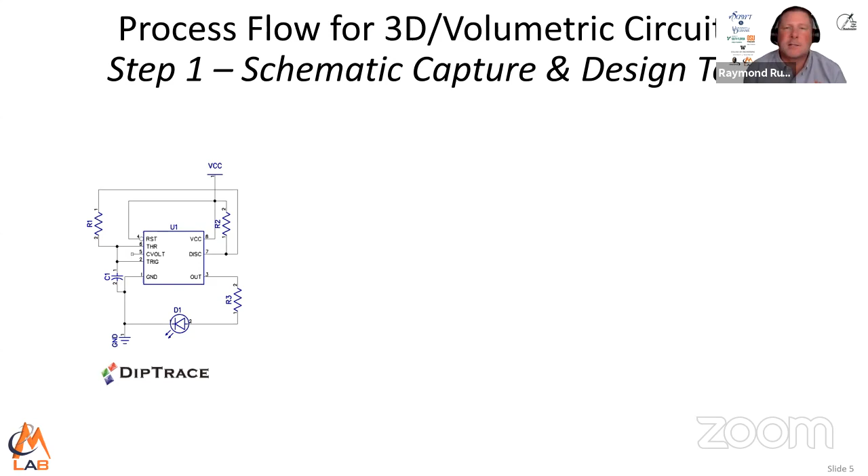So we started with schematic capture. We didn't invent anything there. We used a program called DipTrace, and there's nothing special about that. We could have used a lot of different packages that happened to be free to us, and it exported all of the component geometries and the net list and the things that we needed.

The first thing we had to do was develop a tool to lay out the components and route interconnects in 3 dimensions. So we went with an open source software package called Blender, which has a Python interface that we can script. That imported all of the component geometries and the net list and allowed us to design true 3D circuits.

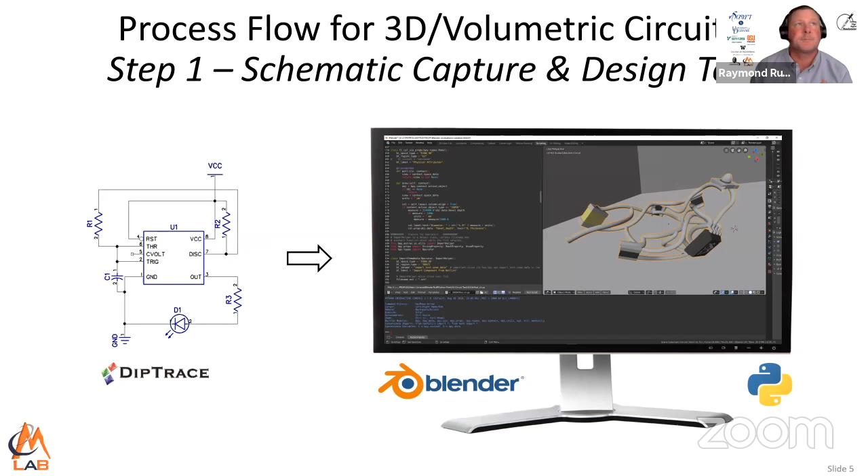On the left, you're looking at a very high speed movie of laying out a circuit in the shape of a bullet or a missile. But step 1 for us is laying out the components.

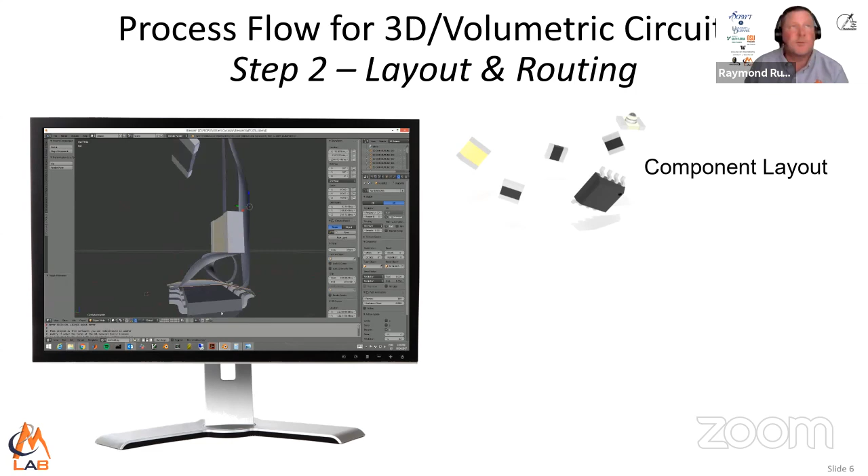Blender is actually an artist tool, not really a CAD tool, although it can be used for that. That's given us very good use of all 3 dimensions, whereas tools like Pro-E and SolidWorks, technically we have access to all 3 dimensions, but even those tools limit you to planes. We're always sketching on a plane, extruding — it's rather Cartesian, whereas with an artist tool you have infinite freedom. So step 1 is laying out the components.

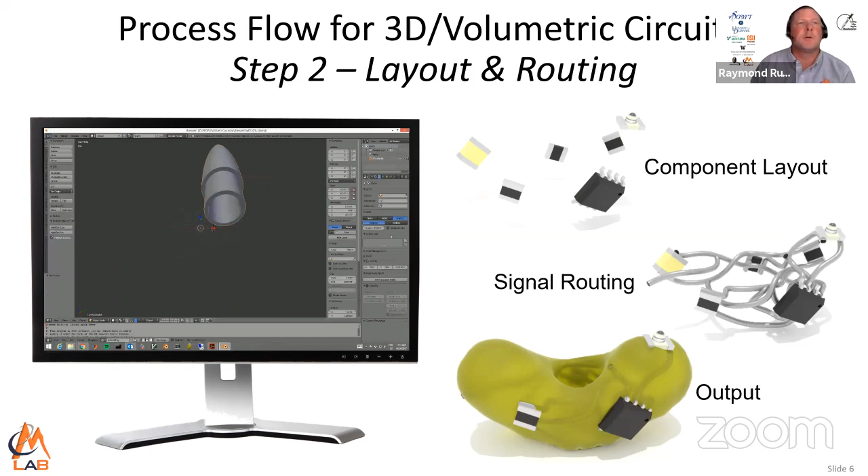Step 2 is routing all the interconnects, and then it exports that as a CAD file. This is sort of where we were stuck — how do we build that? So we had to develop our own processes and our own software to do that as well.

Basically it works like this: we have essentially 2 CAD files — one is the plastics, one is the metals. And of course we can extend that to even more materials. We join that into a single model.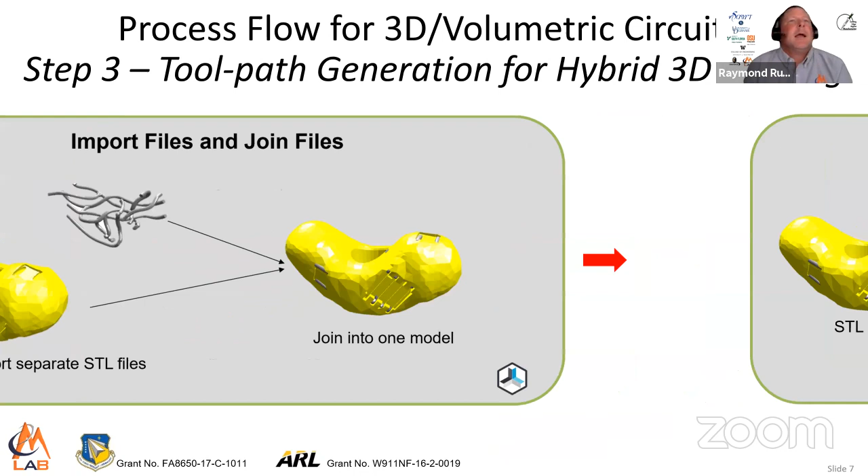We import that into a slicer. In fact, all of these processes and slicing algorithms that we've developed, we're working on commercializing in a product that we call OmniFab. We can do hybrid slicing, where each of the paths is controlled with a different technology.

So our metals, for example, are put down by micro dispensing. The plastics are put down by fused deposition. We can also come in with CNC machining or other types of tools, and we can mix all of this. We've developed a slicer which can do all of that and a lot more.

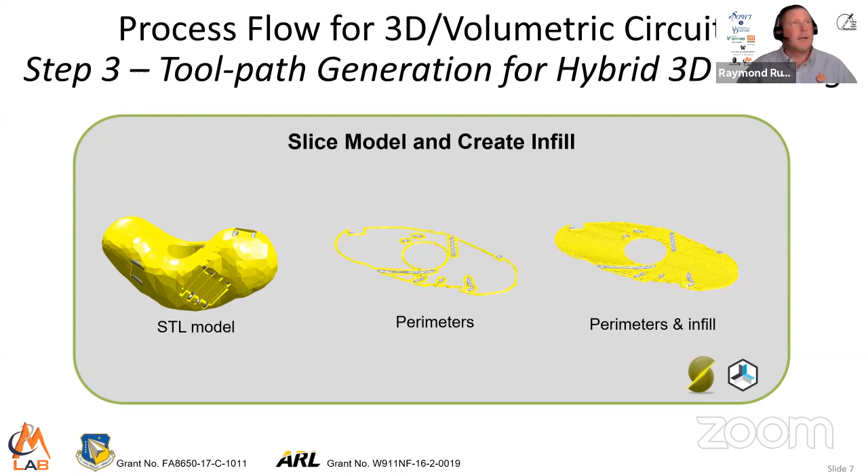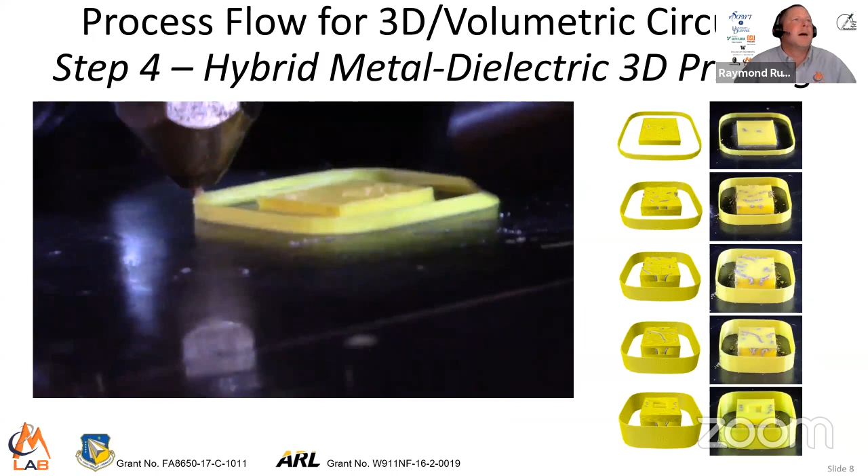Given that, it generates a G-code file which then drives the printer. On the right is our very first 3D volumetric circuit at various stages of the print, which we interrupted. On the left, you're looking at a movie of that, and once in a while you can see the tool changes from plastic to metals as it's printing.

So in summer 2018, we had been working for many years, and it finally all came together. We worked all summer on this and got a wonderful circuit working. It was a huge breakthrough for us, but I'm kind of a jerk, and I told my students I hated it — because it didn't look very 3-dimensional. It was very square, it just looked like a thick circuit board to me, even though internally it is volumetric.

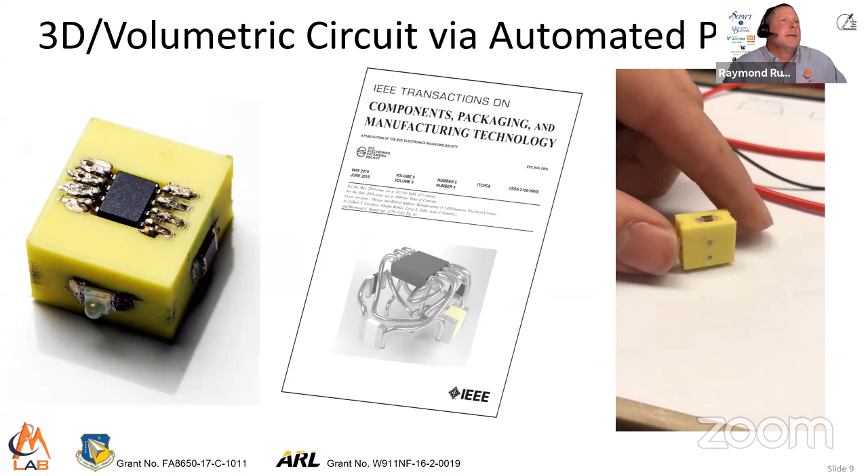They chuckled at that, they tolerated me. So the next thing we did was lay out something that wasn't supposed to look like anything, although it looked kind of like a bean. We put a hole through it just to do that, and ended up calling this effectively the Hole Free-Hole. That kind of put an end to our developing a process to make these 3D volumetric circuits.

Unfortunately I'm limited in time, but we're doing some other things now — RF radios, and some other volumetric things that aren't necessarily circuits, but antennas, metamaterials, bandgap materials, that sort of thing. So that is our Hole Free-Hole.

Our OmniFab tool had some problems with long duration prints, and there were a lot of fixes to that, but some of what we added is maintenance of the tools. As we switch tools, we can take the tool off to the side, scrub it — you can see the brush sitting there. We can dispense ink or some of the plastic to clean the heads between prints. That, combined with a variety of other things, lets us extend our prints to multiple days, we hope.

On the right is actually the first block that we have ever printed with our own custom slicer, written from the ground up.

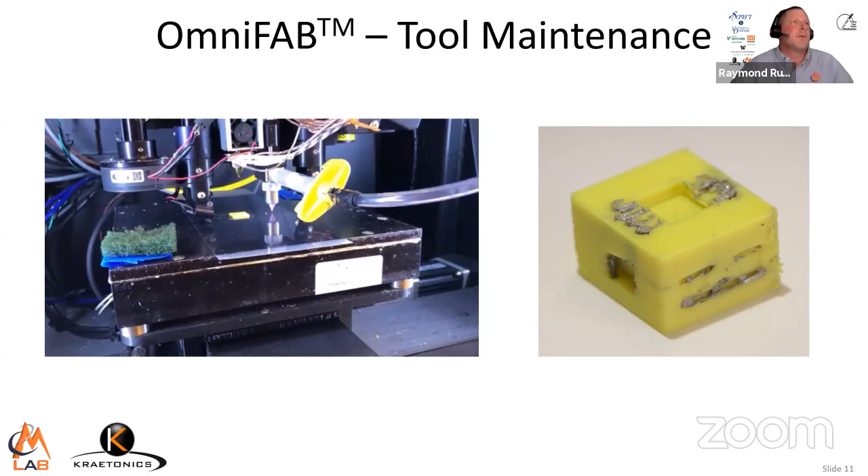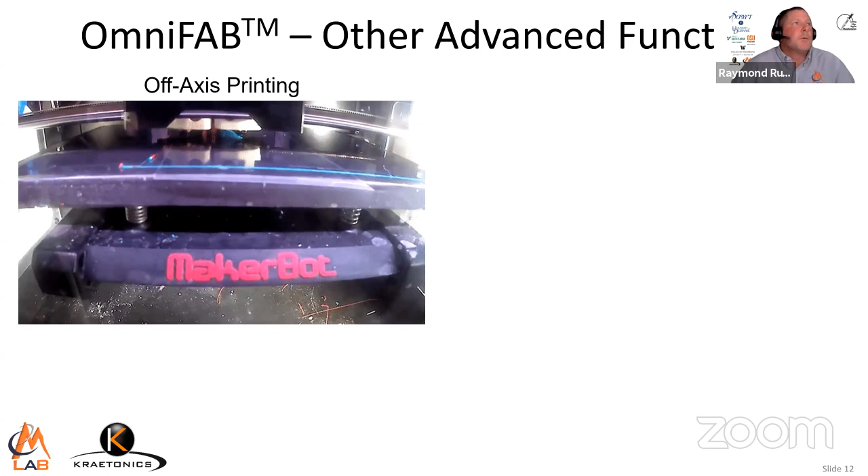And actually, even before that, some of the other things we've done with our slicer, we were doing off-axis printing. You'll see a lot of people spending a lot of money for 6-axis robot arms for doing off-axis printing. And in fact, we can do a lot just with a standard 3-axis printer. That's a 3-axis cheap little MakerBot.

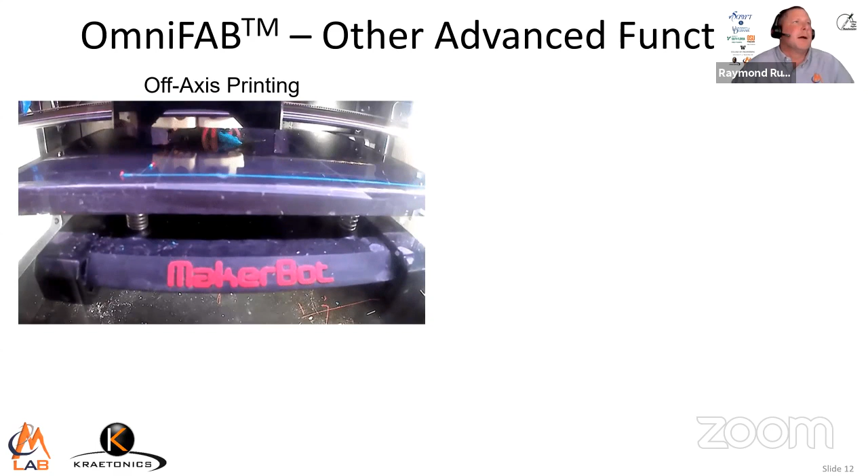So we have this saying that the 1980s called, they want their slicers back. It's time for a new modern slicer that can do all of these things. And we don't necessarily need big, expensive printers to do advanced things. We can do that just with a new slicer.

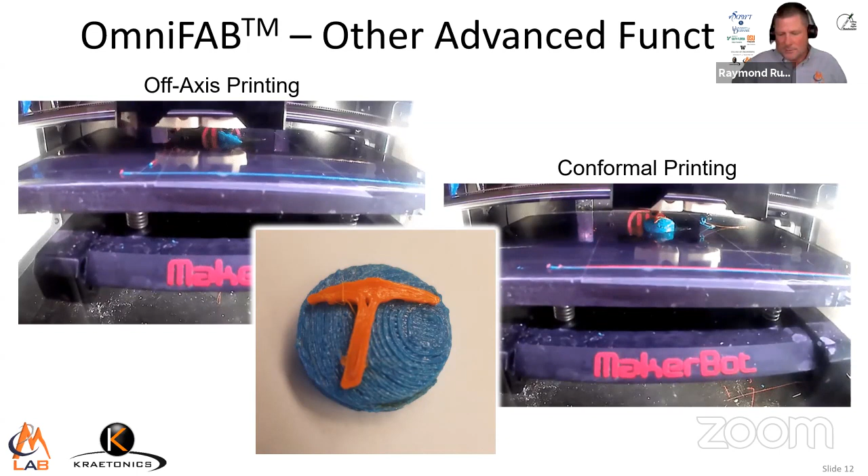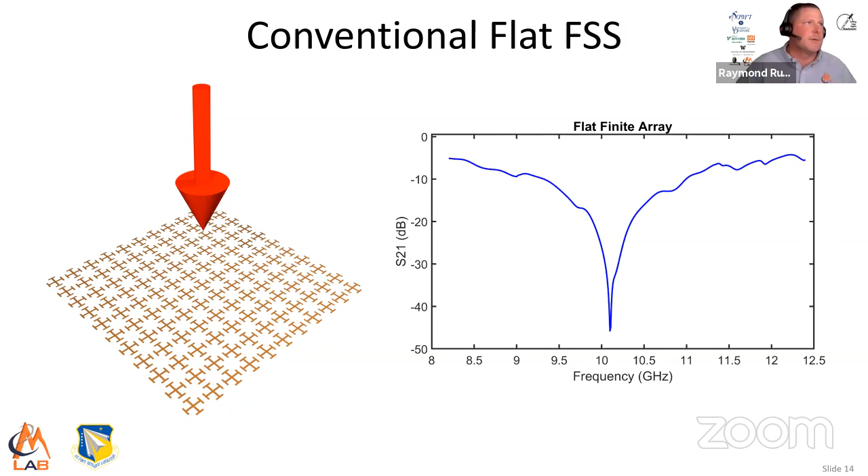However, there's a desire to put these onto curved surfaces. That could be a wing of a UAV, that could be a radome of an antenna. And it's not really known how to do this. And so what people do is they project the pattern down or other types of mapping techniques. But what that does is it deforms a lot of the elements. At the top, the elements look pretty good, but the elements on the side have been stretched because they've been projected, and these no longer work anymore.

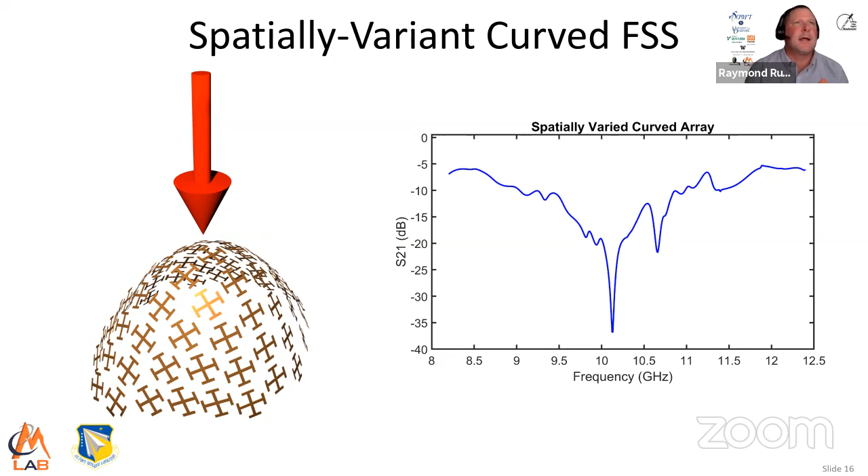And so we have a neat algorithm, actually, we call spatially variant lattices. We're doing a lot of other stuff with that. But one thing we can do is actually come up with a better distribution of elements across curves. And so we can actually bend and twist periodic structures, but still maintain the size and shape of all the unit cells. And so that actually maintains the electromagnetic properties.

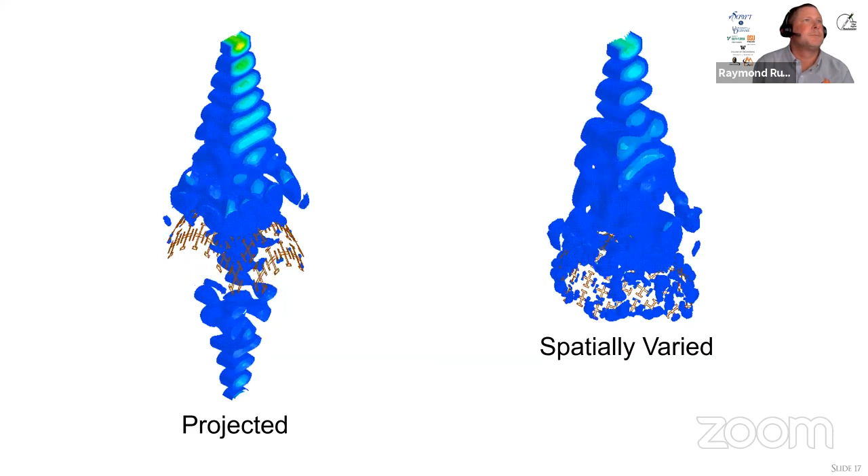We're doing some antenna work. One of the electromagnetic mechanisms that I haven't really talked about is making the dielectrics artificially anisotropic. And that actually lets the plastics do functions for us. Most electromagnetic people just think of the plastics as a way of holding the metals in place, and the metals doing the function. But we can actually make the plastic do profound functions. And so we're looking at incorporating these new degrees of freedom that we've identified into 3D antennas and hopefully approach fundamental limits.

So that's another volumetric part. You can also imagine metamaterials and bandgap materials. We're spatially varying those. We're printing those across curves and other things. And that all requires this ability to build volumetric parts with an arbitrary distribution of metals and dielectrics.

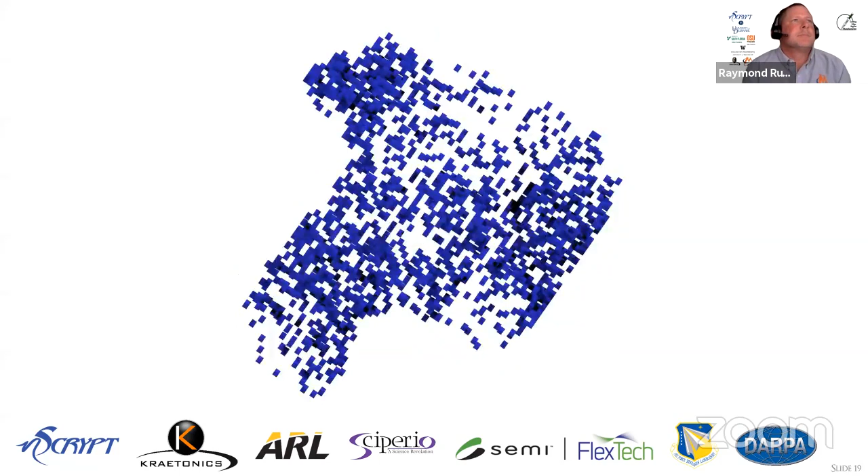So that's it for my talk. I focused exclusively on the hybrid printing and not so much on the electromagnetic mechanisms, but I would love to answer questions. I could talk forever on that.